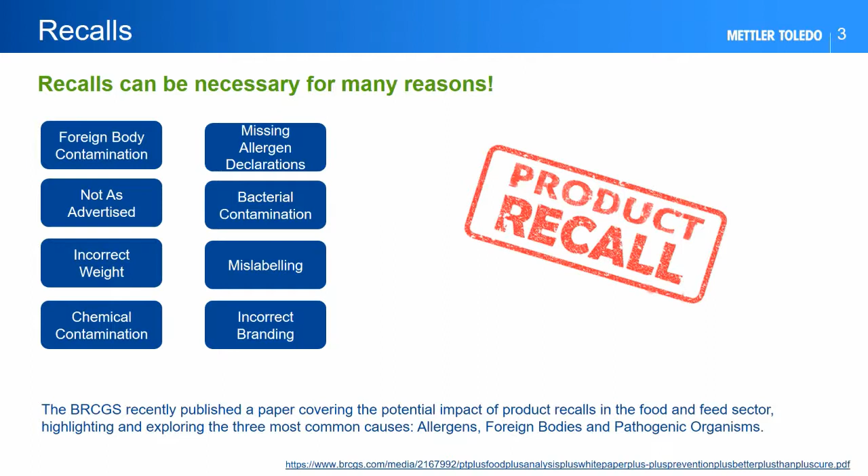Recalls, whether voluntary or involuntary, not only affect the brand owner, but all businesses or individuals involved in the supply chains, all the way from the farm to the manufacturer, the processor, regulators, consumers, and potentially the future security of the business and its employees.

For the brand owner and/or manufacturer, a recall impacts their present and future business, including the cost and time involved to recall a product, investigate the root cause, and implement corrective and preventive measures to keep it from happening again. However, the implications are far more immense than simply protecting bottom-line profits, as depending on the severity of the breach, it can lead to fines, criminal prosecutions, and irretrievable damage to the brand's reputation.

For consumers, physical contamination poses a health risk and ultimately reduces trust and confidence in a brand or product. Depending on the scale and scope of the breach, such as the severity of the foreign body, the vulnerability profile of the consumer group like infants, elderly, and the immune compromised, and the number of brands involved and export destinations, the reputation of the food industry as an entirety, or even a country, can be tarnished.

We have all heard of recalls of some form or another. Many studies have been conducted around consumer confidence and purchasing habits after they become aware of a product recall. On the positive side, 70% of consumers are likely to purchase brands who communicate commitment to food safety. So not only having a good food safety and product inspection process in place, but communicating those commitments can have a positive impact. On the other side, up to 64% of consumers are unlikely to purchase from a brand for 6 to 12 months after a recall. And if you're in a seasonal business, this could be catastrophic.

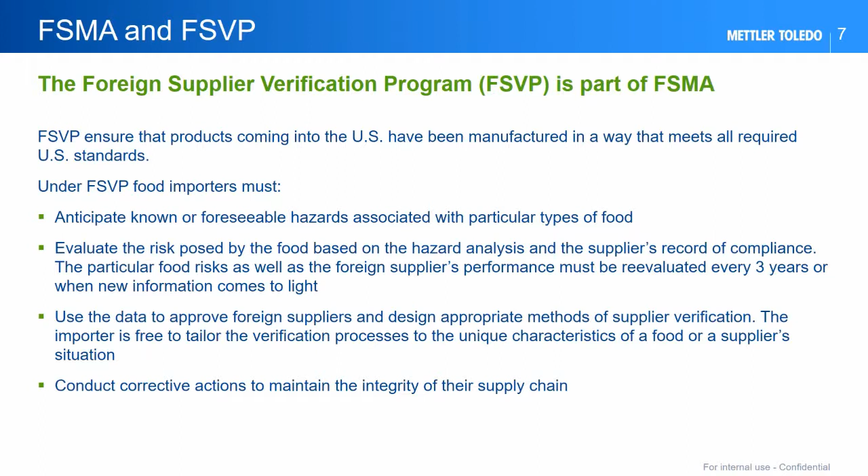In today's food manufacturing environments, there are risks for physical contamination from the farm to the fork. Contaminated raw materials make their way into the product. The processing equipment itself can also be a risk, as an example, a sifting screen breaking or damaged mixing or blending equipment causing contamination.

Metal detection inspection solutions are utilized to remove unwanted metal contaminants from products in the food segment. Metal contamination inspection supports all major retailer codes of practice and international food safety standards, including the BRCGS, IFS, SQF, and FSSC 22000, providing assurances the product is free from ferrous, non-ferrous, and stainless steel type metal contamination.

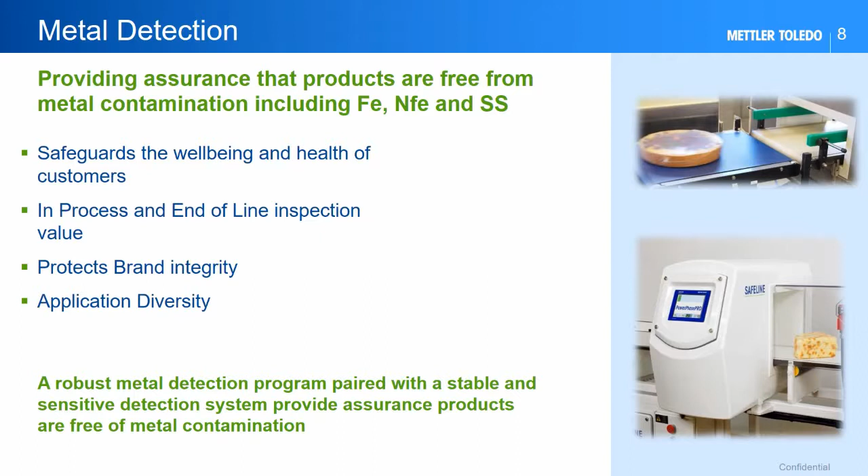Applications throughout the process include inline bulk flow and pumped product inspections, as well as end-of-the-line finished product inspections, protecting your brand integrity. Metal detection systems work on a conductivity principle, where anything of a conductive nature passing through the detector may have an effect.

Ferrous is more conductive than stainless steel, so typically ferrous is easier to detect than stainless steel. The product may have conditions such as temperature, moisture percentage, acidity, and salt content. These factors can have an influence on the system, especially if these areas in the product are inconsistent.

Some of the other factors affecting performance include the size of the detector opening. The larger the opening, the less sensitive the device. As many contaminants will be irregular in shape, it is important to have an understanding of orientation effect as well.

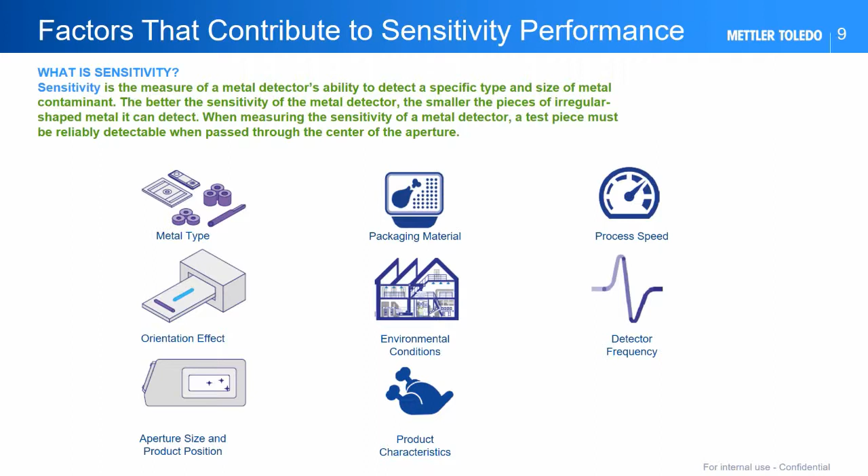Metal as a foreign material is not the only risk we need to consider. X-ray inspection solutions are designed to remove unwanted contamination, including metal, glass, mineral stone, calcified bone, and dense plastics from all types of product in the food industry.

Applications include bulk flow and pumped applications, as well as end-of-the-line finished product inspections, which is becoming more popular for not only contamination, but other quality attributes such as fill level, component verification, as well as mass measurement and seal inspections.

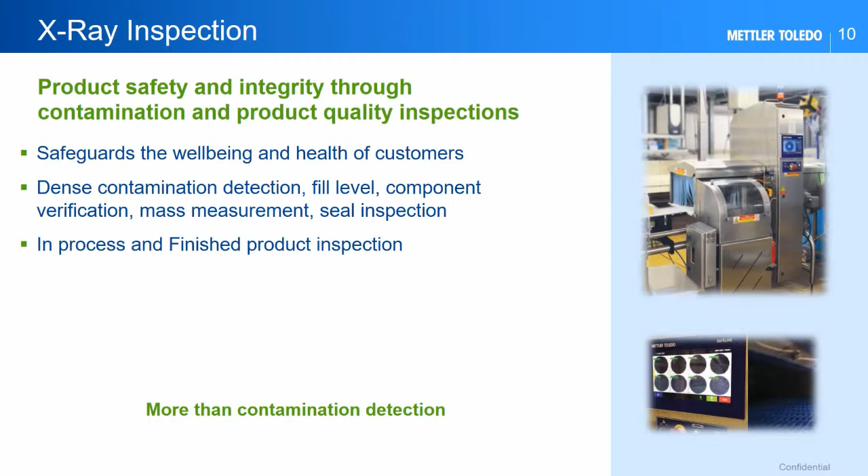X-ray inspection systems work on a density principle, where the density of the contaminant must be greater than the density of the product to be recognized. The X-rays produce an image of the product similar to a medical X-ray at the doctor. In this case, the doctor is the software, where the image is analyzed for defects.

Because the system is working on density variations, unlike metal detectors, the conductive nature of the product has no effect on the performance of the X-ray. Changes in the product temperature or moisture do not affect the X-ray's performance.

The less dense the material, the more difficult to identify in the X-ray inspection. Wood, for example, is a very hard substance. Think of a hard baseball bat. However, wood is not a very dense material, making it undetectable in an X-ray application.

A complete foreign material prevention and detection program will include prevention measures, good maintenance, and both metal detection and X-ray inspection to protect against the widest range of potential physical contaminations.

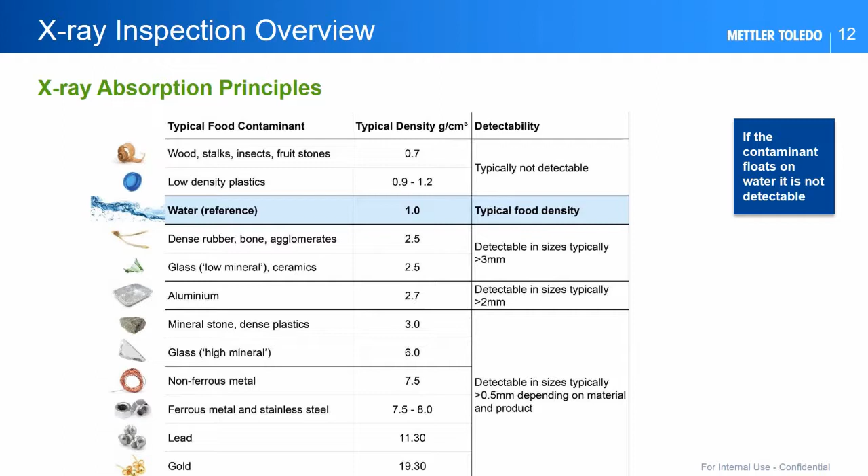Inspection technologies have advanced to detect a wider range of contaminants in smaller shapes and sizes with better resolution and lower false reject rates. Software has also evolved to improve setup times through automation capabilities and enhance operational time via easy-to-use, intuitive touchscreen displays.

An additional consideration is the digitalization within your production facility. Connected manufacturing across networked infrastructures enables you to access inspection data on other devices and facilitates remote control of systems. Technology called Open Platform Communications is available, which enables you to seamlessly integrate all of your data. Digitalization further supports your food safety efforts through providing transparent traceability to most stakeholders.

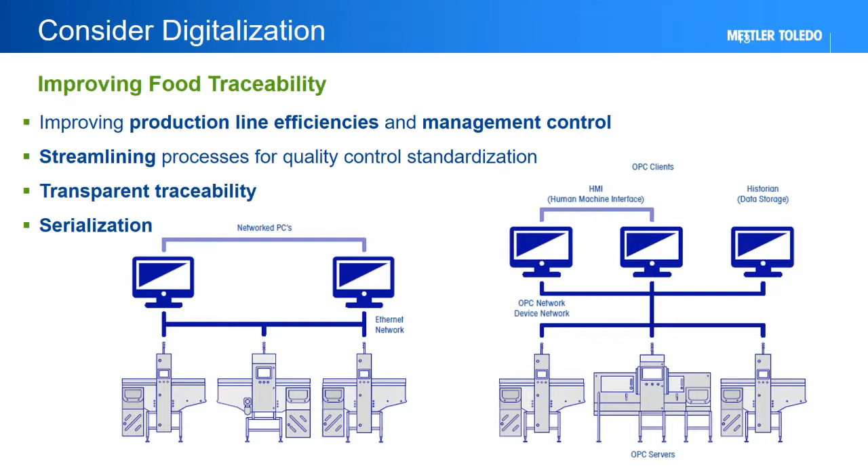Product inspection systems are often identified as critical or preventive control devices. Historically, we've seen product inspection devices such as metal detectors, checkweighers, X-ray, and vision inspection systems located near the end of the food processes, typically after the product is in the final packaging. This makes sense when you think about some of the inspections. As an example, if we're inspecting for the presence of a proper expiration code or confirming compliance with proper weight declarations, the final step in the process makes sense.

You may also feel that inspecting with metal detection and X-ray inspection makes sense at this location. However, let's consider root cause investigations. Identifying a non-conforming product at the end of the line requires a look back through the entire value chain to identify the root cause. Most food safety programs include requirements for corrective action implementation.

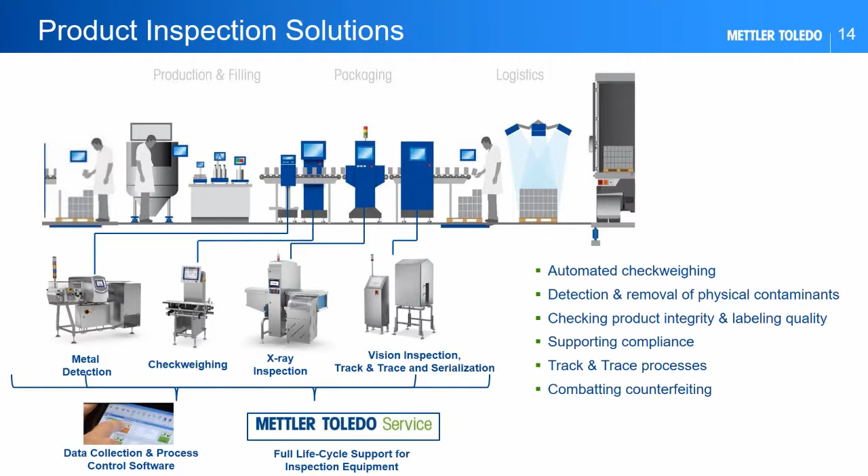The root cause could be from the supplier, or it could have been caused during transport. It's also possible the issue occurred at some point in the production process itself, making it very difficult to identify the true source so proper corrective action and preventive measures can be implemented.

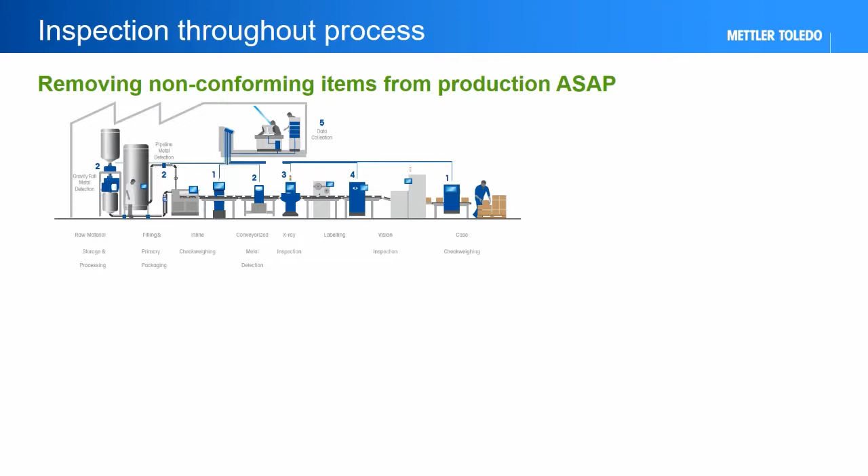Inspections throughout the process will help to ensure non-conforming items are removed as early in the process as possible. It should start with ensuring non-conforming items are controlled at the supplier. Once the material is in-house, there could be an inspection inspecting raw materials at the batching stage. This will help to remove any non-conforming items at the beginning stages, as well as make it easy to identify the root cause.

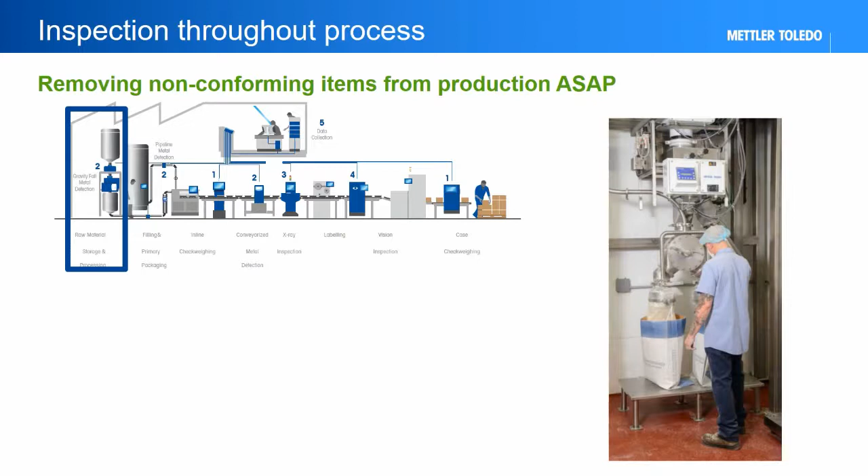There is opportunity during further processing as well. Inspections of filling materials in a pipeline application will remove unwanted items prior to filling them into further value-added commodities.

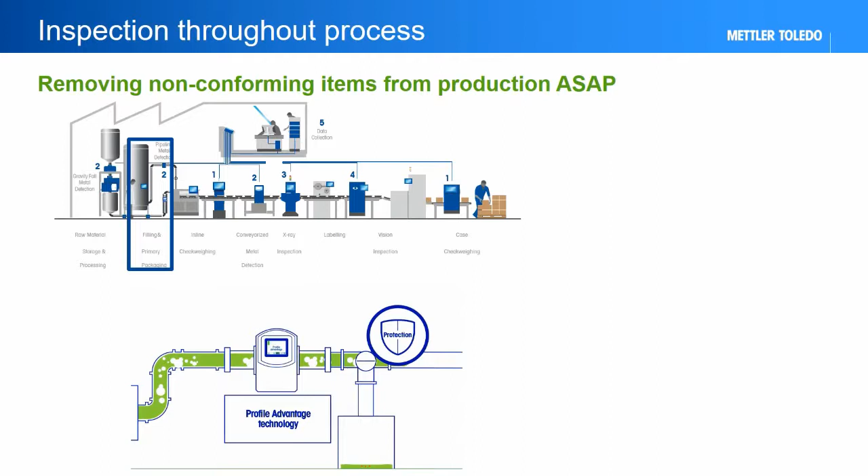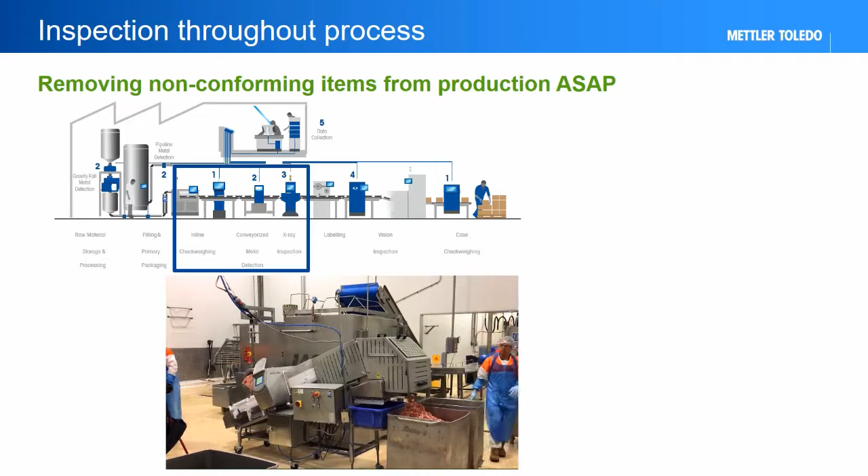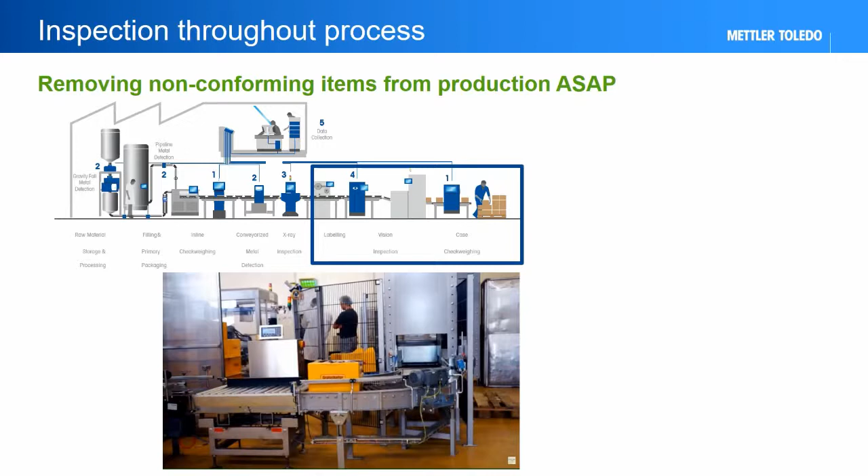During primary production is also a good location, especially when deployed right after high-risk processes such as grinding or a blending stage. And finally, at the packaging stage, where hopefully all the non-conforming items have been previously removed, as a final inspection. However, finding a non-conformance at this stage is the most wasteful, as all the ingredients, time, energy, effort, and packaging material have been added, and a reject at this point is a complete waste of that resource.